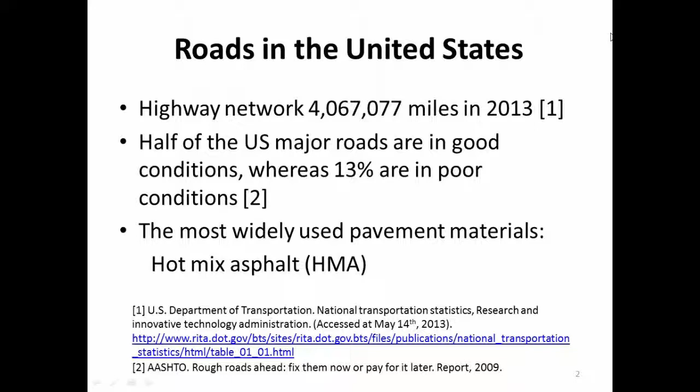So I checked, and fortunately, civil engineers know it's hot mix asphalt, short name HMA. When we build roads, the bottom left picture shows the multi-layer structure: we have the sub-base course, the base course, and then on the very top we put the pavement system.

On the bottom right picture, you can see a group of people working hard on building this pavement system. Every time I go on Route 93, I see some of these vehicles. It's really a good experience and makes me more aware of the cracks. Every year they do the same thing, so you can see how much investment they put into this material.

So what is HMA, or hot mix asphalt? It's a mixture of asphalt binder and graded mineral aggregates. They mix them at elevated temperature, let's say 150 to 166 degrees. This range depends on which binder you use, so there will be a little difference. Then they compact them to form a relatively dense pavement layer.

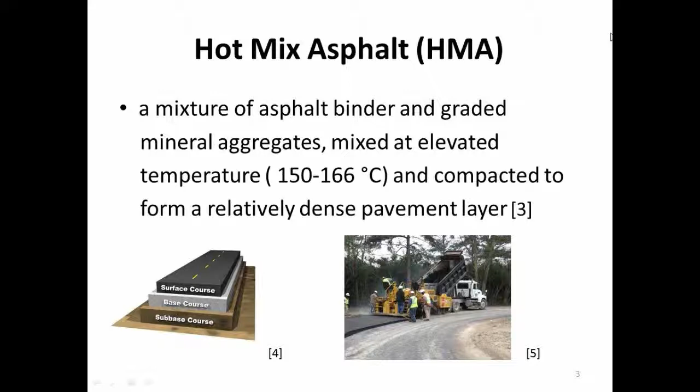When we put them into an integral part, we hope they can last forever, but it seems like they only last a few months, especially in winter. Here are two typical failures of pavement materials. The upper picture shows what's called reflective cracking - it cracks from one side and goes across the road to the other side. The lower one shows small cracks, which are very evident everywhere. This is another kind of crack, but anyway, both are cracking of the asphalt pavement system.

In a report issued between 2007 and 2012, you see reference 6 there - these names represent basically, I think, maybe 90% of the asphalt experts in the United States. They formed an entire group to study how asphalt cracks, and they came up with this report.

They concluded that low temperature cracking is a dominant distress on asphalt pavement, especially in cold regions. Fortunately, if you check their institutes, some are from the University of Minnesota, some from Canada, and some from the University of Illinois, UIUC.

What causes this cracking is the interaction between thermal, mechanical, and chemical factors. There's no single solution to account for this cracking. For example, for thermal factors, if you have a huge temperature difference between daytime and night, or between different seasons, it can cause cracks.

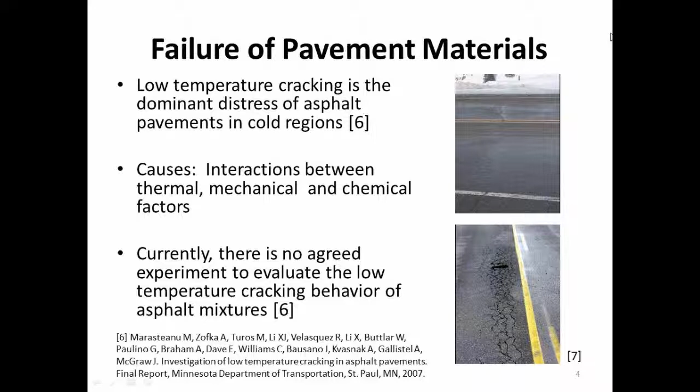So here are some components of the asphalt mixtures. First is the asphalt binder, shown in the top right picture. The asphalt binder can be obtained either from industry or nature. There's a very famous asphalt lake - if you search it online it will show you the location. The entire lake was formed by ancient geological movement, and it's all asphalt.

Then the other part is the aggregates. As we see here, we have fine and coarse aggregates - different sizes of particles, stones, or sands. When we put them together, there's one thing we cannot avoid: air voids, which are the vacant space between them.

Finally, if we want to improve some properties, we may add polymer modifiers to modify the property of the binders, or add fibers to bridge cracks, and sometimes recycled rubbers from the vehicle industry to increase the property. So we have all these things here.

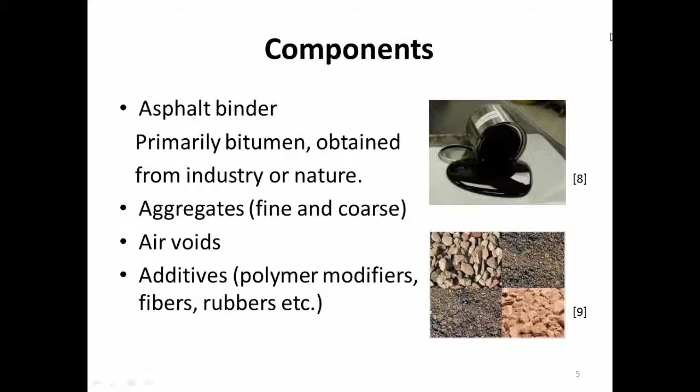Here's some imagery showing what mixed asphalt looks like. These four images show the different size distribution of the aggregates. If you see the gradient in the right picture, the aggregates can change from very large to very small. This isn't a scientific description, but I'm showing you so you can see the gradient.

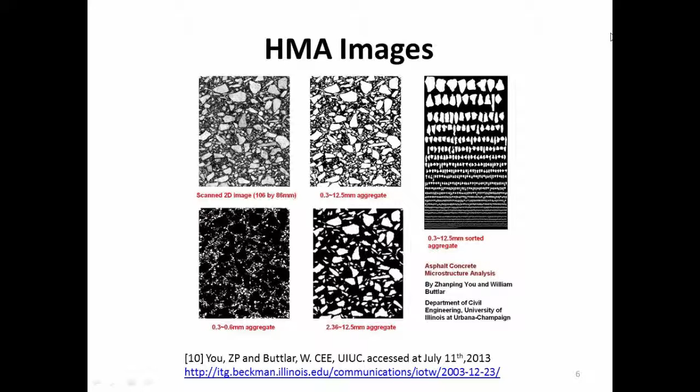Then we dig out a small part and zoom in, and we see that we have stones, which are aggregates, we have mortars, which are binders, and we have voids. Most of the time, we'll stop here.

But if we go one step further, we take this mortar out and see it. We see small sands, and we see the mastic. What's in the mastic? If we go one more step, we see there are fillers, the mineral fillers, and also the bitumen.

This bitumen is the primary component of asphalt. If we look at the bitumen microstructure, we see that it's composed of both asphaltenes and maltenes. This goes to the chemical structure of this material.

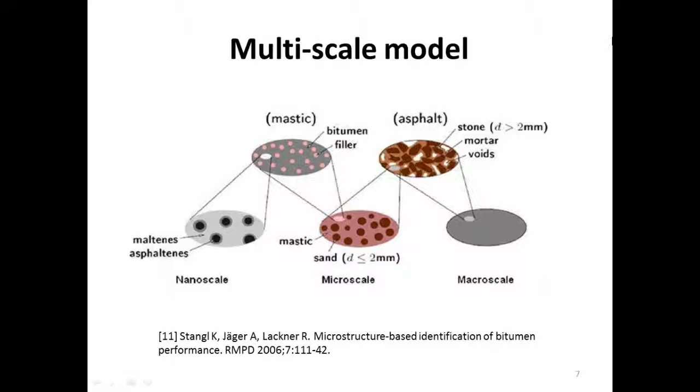What are the major components of asphaltenes and maltenes? The asphaltenes are these black ones. Maltenes consists of resins, aromatics, and saturates. These two have larger molecular weight, and these two have lighter molecular weight. The ring shape of the asphaltenes depends on the ratio between this one and this one - sometimes it's disconnected, sometimes it's a ring.

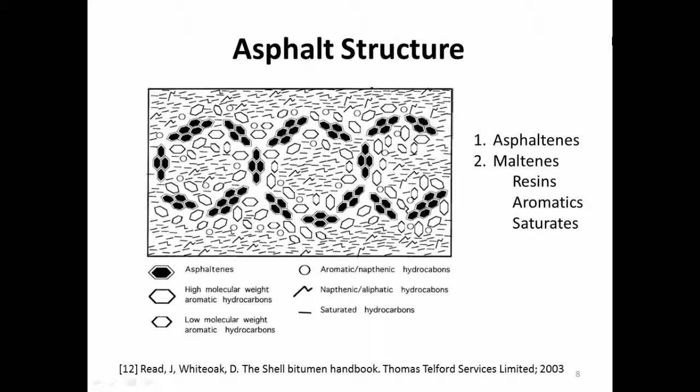If we want to study the material properties of these asphalt mixtures, we need to know where we get specimens - that's very critical. Sometimes we have so many roads and so many roads. For field specimens, we use a core drill machine to take the cylinder sample out. But if we have a different formula for the asphalt mixture, we want to know the property before we put it into practice.

So we make lab specimens using a gyratory compaction machine. You have a cylinder, you put the mixture inside, start the machine, and when it rotates, finally this is your final product. If we look at both of these, what's the similarity? Geometry - you have the cylinder geometry. Sometimes the cylinder geometry can be a very important factor for experimental development.

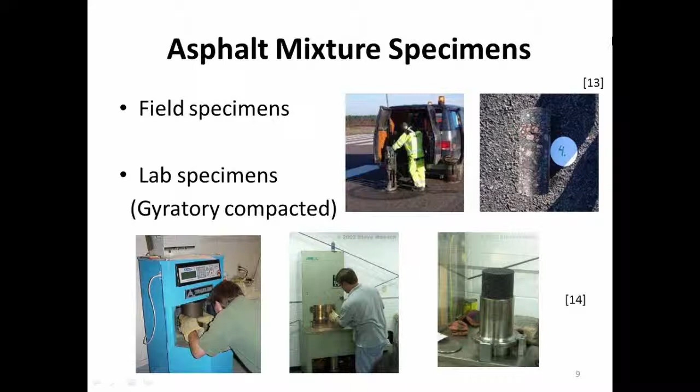Okay, so here, right now we know we get the specimen, and then we want to know how the crack grows or how the crack formulates, initiates. So basically, there are three basic fracture modes here.

The first one is mode 1, called opening, which is something like this. You have tensile force on both sides and tear it apart, right? This is a very straightforward one and the most dominant one.

The second one is called in-plane shear, sliding. You have two things, and you slide into different directions. You have this sliding, mode 2.

For the third one, if you have two fingers and each finger moves at different directions, the crack will go according to the moving direction of the object, right? So this is called out-plane shear. So basically, these are the three basic modes of cracks, how we describe it.

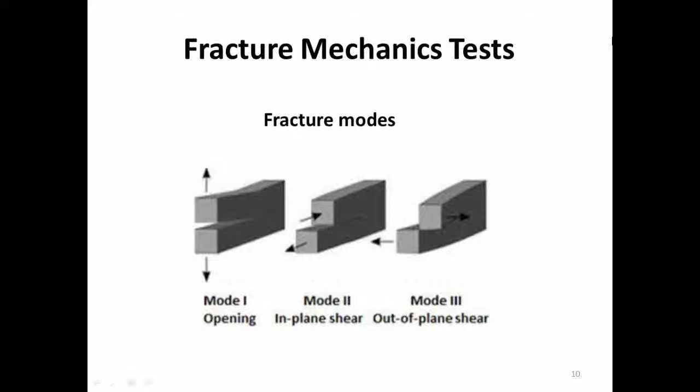And in reality, the crack never happens in either mode 1 or mode 2 alone. It happens in a combination of tensile and shear. So it's either mode 1 plus mode 2, or mode 1 plus mode 3. But mode 1 is the dominant one.

So for the mode 1 test, there are a few primary tests. The first one is called the single edge notch beam. You have this beam test, a 3-point bending test, 1, 2, 3. So what we do is we put a notch here so the crack will grow along this notch direction.

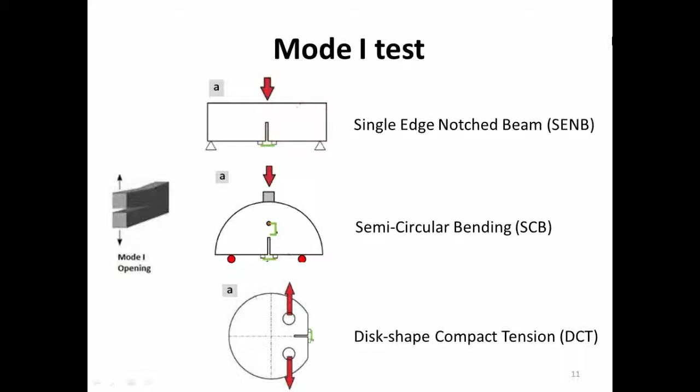So somebody may ask, why do you need so many different tests? Let me explain. The first one is called the SENB. This is a test originally used in mechanical engineering, and it was adapted by ASTM, the American Society for Testing and Materials, for a long time. So it was used for metals, polymers, and whatever it is, for a long time.

And then the asphalt industry borrowed it from the mechanical industry, and they get these things, and you can see here. So one advantage of this is because it's a mature test, so either the interpretation or the setup is very ready to get. But the disadvantage for this specimen is you see the specimen size, it's rectangular, right? But what's the specimen size for our asphalt concrete?

Cylinders, right? So that means if you want to get this kind of shape, you need to invest extra effort to chop into that shape, and this can also induce further damage to the original sample. So that's why they say, okay, maybe, but it has been useful for many years.

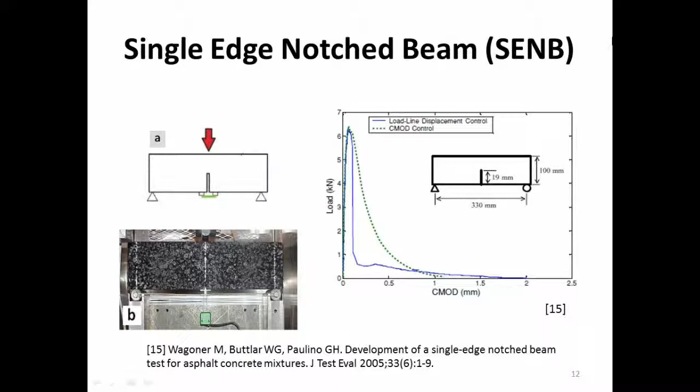And then people said, okay, we have certain cylindrical samples, and we don't want to chop them too much. So we came up with this half disc, the semicircular bending test. So they get one specimen either from lab or from field, they chop it into different layers. For each of them, they cut into halves, and then each of them can be fabricated into two SCB specimens. So that means this one is easier than the rectangular shape, right? So that has been used for many years.

But one argument for this specimen is that because of this wedge shape, when you put this load at this point, and when the crack grows approaching the outer surface, it has a wedge effect. The crack will not grow straight and deviates. So we don't want that, and we want to know what's really happening.

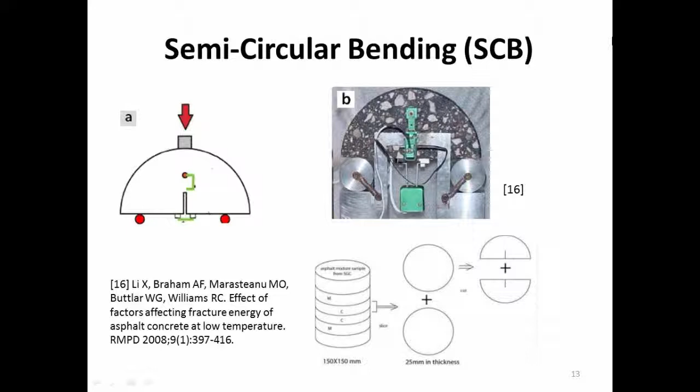We all know that when we put the asphalt binder into the mixture, it's a viscoelastic material. So when the temperature decreases, especially from -30, -40 degrees, the viscoelastic properties of the material shrink, and the composite behaves more like a solid instead of soft. As you increase the temperature, the viscous property of the material becomes more and more dominant. The peak load decreases, but you get a much more relaxed curve.

So in order to describe the fracture property here, they came up with two indices. One is called the fracture toughness, related to the peak load at different temperatures. As temperature increases, fracture toughness decreases because the peak load decreases.

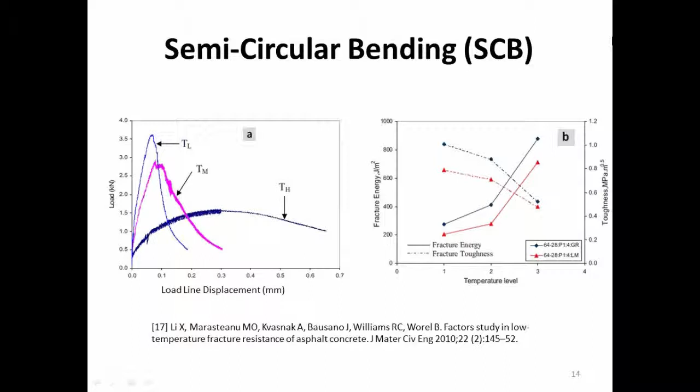The other one is fracture energy, meaning how much energy we invest to create the crack. They counted the area below these curves and found that as temperature increases, the amount of energy to create the crack is more, because the viscoelastic property is more evident. You can see this increasing trend.

Fracture mechanics originated from good materials, nice uniform pigments like metals, so it's easier to study there. But for asphalt mixtures, we know they have aggregates, binders, and voids, so the behavior in front of the crack tip isn't the same situation as described for metals. So people started thinking about how the crack grows in these asphalt mixtures.

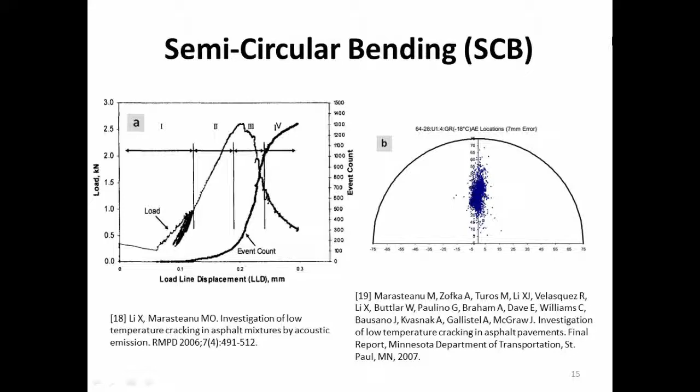This applies only to asphalt mixtures or similarly brittle materials. Then we come to the third test. Because of the wedging effect I described for the SCB test, they didn't want this wedge, so they came up with two holes and tear the specimen apart to let the crack grow. Because of the similar cylindrical shape, this has also been adopted since 2005, and it's a very popular test right now.

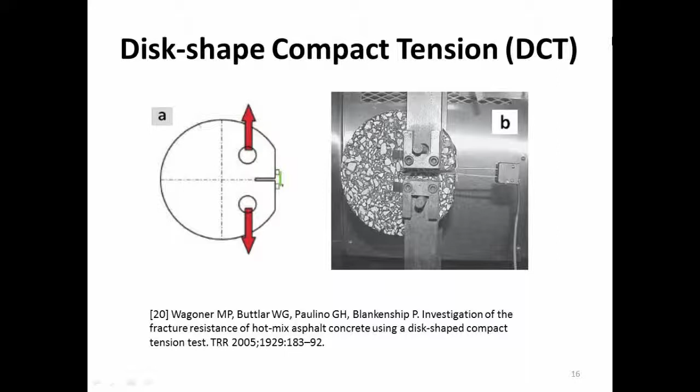But one interesting thing here is that if you look at this specimen closely, you need two holes to apply the forces. This specimen is shown in 2D, with the third dimension orthogonal to the page. If you change the thickness of the specimen, the fracture energy you observe changes. So what's the size effect of this specimen? We don't know.

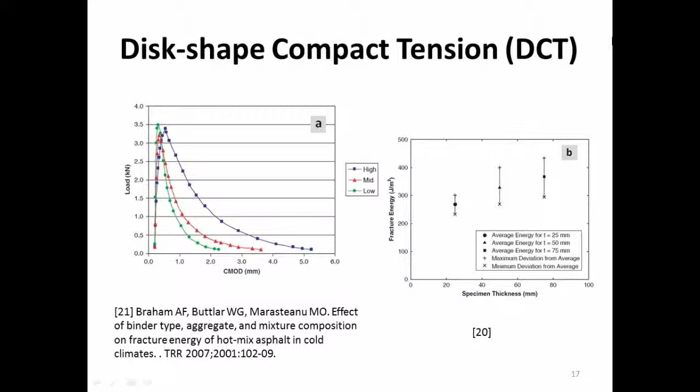They already put a lot of effort into this study, but one thing they can tell us is, no matter what specimen you use, the size of the specimen is also critical to the problem study. So we just went over the mode 1 tests, basically 3 mode 1 tests: the SENB, SCB, and DCT test.

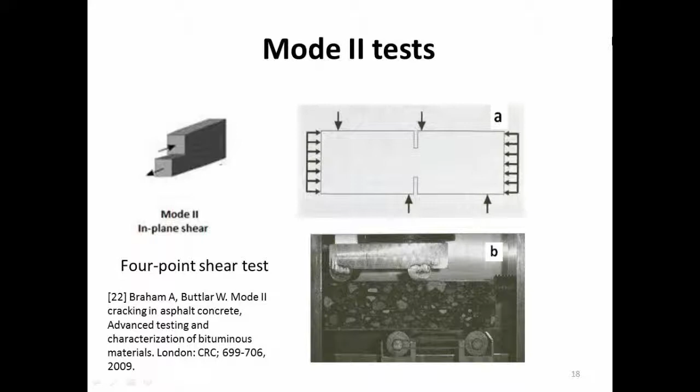So how about mode 2, the sliding one? There aren't too many pure mode 2 tests, but one of them is called the 4-point shear test. Basically you put a pair of loads here, and because of the position between these two, it can create a sliding effect in this middle part, which helps fail the specimen.

One of the reasons is for this mode 2 crack: when the crack happens, the crack process shifts from a propagation to a sliding process very, very quickly. And then your problem becomes a crack-to-friction problem. So more effort is needed to investigate this.

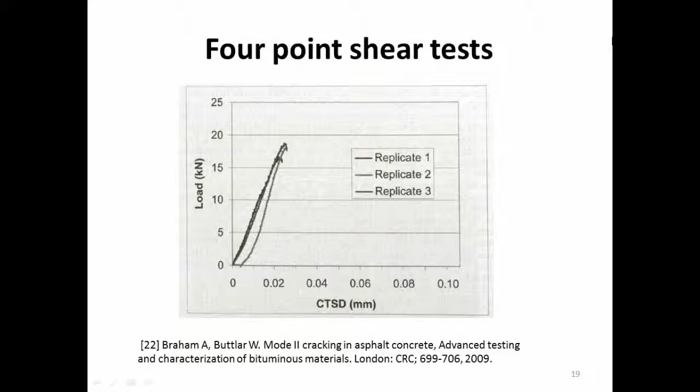But anyway, we have this data, we know what the mode 2 graphs look like. And then, as I said, in real conditions, the crack seldom happens in a single mode. So there will be mixed mode.

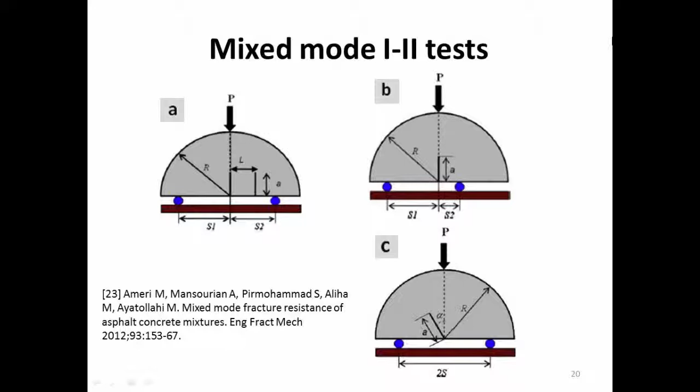By using the finite element method, we can study different mode scenarios for this test. Similar things also happen if you shift the notch in an SENB test from the middle to the side - you can also get this mixed mode crack. You see the crack here is not going perpendicular to the edges.

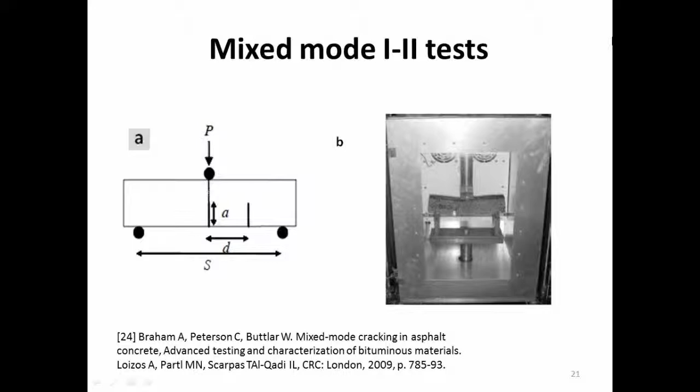But one issue with this test is, if you shift the notch too far away, the crack will not happen there - it will happen in the middle. So how can we control this? They say they know, but I don't know.

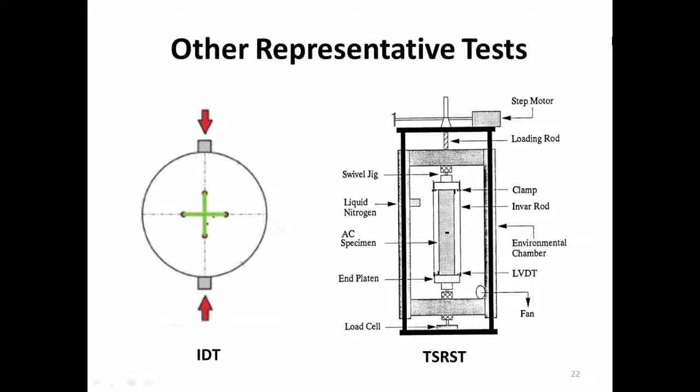So previously we talked about the mode 1 test, mode 2 test, and mixed mode 1-2 test. There are also some other tests that are not fracture mechanics based - when I say fracture mechanics, I mean you have a notch. These are two very dominant tests, and both are included in this year's NETC solicitation for WMA materials. But let me tell you what they say here.

The first one is called the indirect tension test. What you do is take this cylinder without any notches, put it into this setup, and apply compression force. The specimen will split to both sides and fail. It's called indirect tension because it's very hard to apply pure direct tension, so you use compression instead and fail it in tension. It's a complicated idea, but it's an indirect tension test. Because of its convenience, it has been widely used throughout the asphalt industry, not only in the United States but all over the world.

But one disadvantage of this test is it cannot simulate how the crack propagates, because as soon as the specimen fails, it splits into different parts. The other issue is that the strength values from the indirect tension test sometimes cannot rate the specimen very well. That's also the same conclusion based on my communication with the VTrans people - sometimes they find the test not good enough.

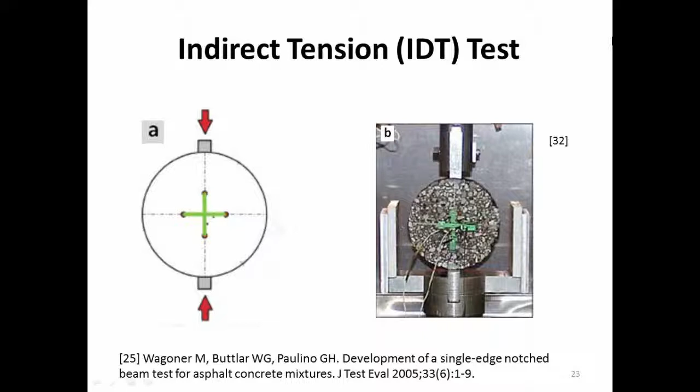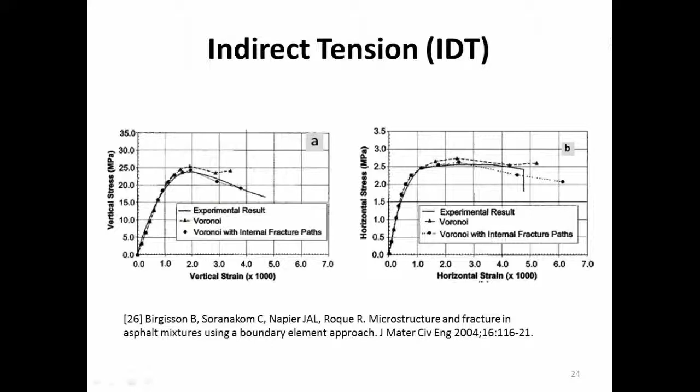The other test is called the thermal stress restrained specimen test, TSRST. The idea here is very straightforward: they have a rectangular specimen and fix the plates so they will not move. Then they decrease the temperature in an environment chamber, so as temperature decreases, what will happen?

Yes, and at one point when your temperature is too low, the specimen will fracture, right? Because if you decrease the temperature, the specimen is supposed to shrink as well, but you hold them there, so it will fracture.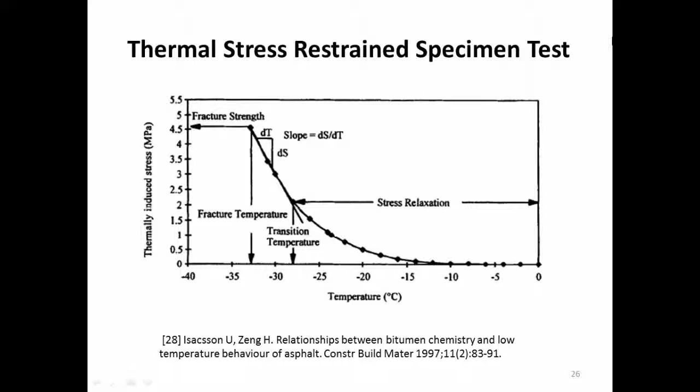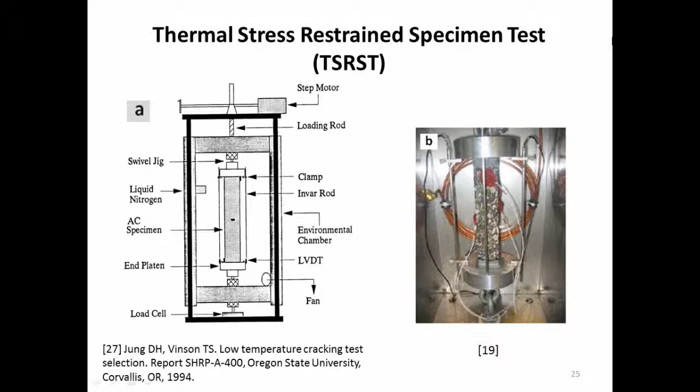There's some measure of stresses. But for this method, the idea is straightforward and gives some information, but one thing it cannot simulate is there's no load here. In reality, as I said, cracking is always a combination of thermal, mechanical, and chemical reasons. So this one is good, but it cannot explain all situations.

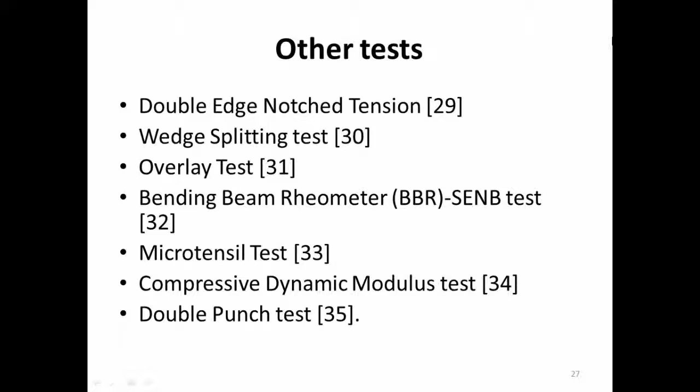So there are some other tests. They call it something like a double-edge notch tension test, wedge splitting test, overlay test, bending beam rheometer, SENB test, micro tensile test, compressive dynamic modulus test, and also double punch test. All of them, instead of putting one edge, put like two notches, or they have a combination of different tests. These are the corresponding references I found for this test.

So here comes my summary. In this presentation, I summarized there are different tests to evaluate the fracture of asphalt mixtures, including the single notch SENB, SCB, DCT, IDT, and TSRST test. For the mode 1 test, we have SENB test, SCB test, and DCT test.

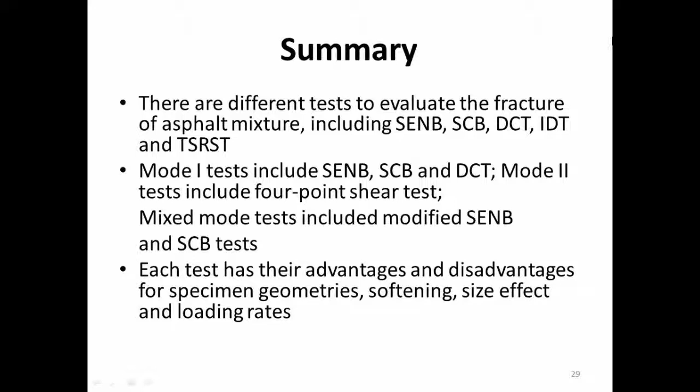And for the mode 2 test, we have the 4-point shear test. For the mixed mode test, there will be a modified SENB or SCB test. Each test has its advantages and disadvantages for specimen geometries, softening, size effect, and loading rates. And that's why they want to use all of them, and they haven't come up with an agreed experiment yet.

So, and thank you. Any questions?

So as part of your research, can you come up with a suggested method for a standardized way to test asphalt? Oh, if I can do that, I will be very famous.

Good. So here my question is, let me answer the question from the other way. From the presentation I showed, do you think I missed something? Yes. Well, maybe you didn't miss something, but you may not have told us something.

When you're testing other materials like wood or steel for construction in a building or a bridge, I can see how the connection between your test and the final structure are related. In this case, the way that I see asphalt being laid on the ground where it's continuously supported, I'm having a hard time connecting how cracks are being formed and propagated and eventually fail in an environment where they're acting with point support as opposed to continuous support.

So this is a very good question, right? First, I'd like to answer. The problem you are talking about is like a mix of fracture and fatigue.